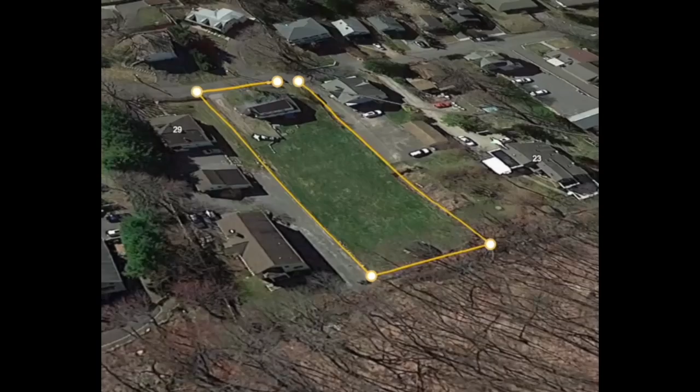Ridgefield Inland Wetlands Board. Public hearing. Application IW24-19. 27 Abbott Avenue. September 26, 2024.

Okay, this is the regularly scheduled meeting of the Town of Ridgefield Inland Wetlands Board for Thursday, September 26, 2024. In attendance, we have Carson Fincham, David Smith, Alan Pilch, Tim Bishop, and Isaac Flatto, and myself, Susan Baker, and staff members Artie Paranjape, Caleb Johnson.

And first on our agenda this evening will be IW 24-19, 27 Abbott Avenue, plenary ruling application for the construction of 10 residential townhouses with associated drainage and landscaping within the upland review area of wetlands and watercourses. Owner Vitan Alimi, applicant Brian Carey. And do we have new documents? I think we have new documents that Caleb will read into the record.

Yes. Okay. We have Land Tech response to Steve Danzer comments dated September 12, 2024. Steve Trinkus, 27 Abbott Avenue review dated September 24, 2024. Intervenor attorney correspondence dated September 24, 2024. DEP listed species to protect. Intervenor reply to applicant introduction of irrelevant materials. 27 Abbott Avenue site plan dated September 25th, 2024. 27 Abbott Avenue drainage report dated September 25th, 2024.

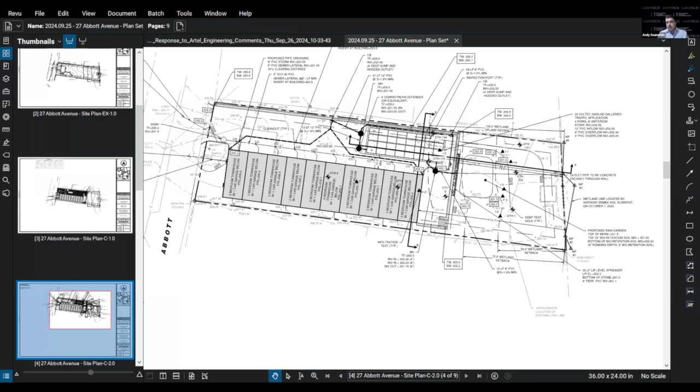In terms of the drainage behind the wall, we removed the drains behind the wall, as recommended by the third-party reviewer. So there's no drains behind that retaining wall. And then the level spreader comment, we've revised this rear backyard now, which was to have soil amended and plantings and the such. We've now introduced a rain garden. So there's a rain garden here now also.

So from a drainage perspective, again, just to recap, roof runoff, all paved surfaces, go through a catch basin, through a hydrodynamic separator, through the infiltration system, into a level spreader. The level spreader now overtops into a rain garden. And then from the rain garden, it would go out towards the wetland.

So the rain garden now, I know LID was a big talk. So this is one of those, I'd like to call them biofiltration type LID that we've added and implemented now through the rear yard. And in a minute, you'll hear from Brian how we've replanted that entire backyard and incorporated plantings within the rain garden.

And by regrading this backyard and amending that soil, it allows that runoff to go directly to the wetlands versus going onto neighboring properties as well. So that one's kind of twofold. It was an Artel comment as well as an SLR comment. So those were really the 3 minor comments that we introduced.

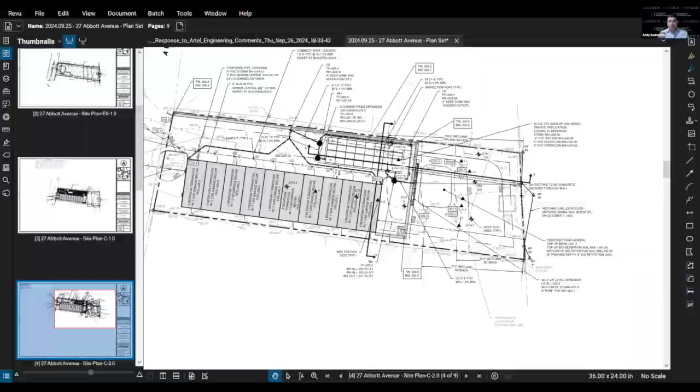The rain garden, just so you know, does about an additional 500 cubic feet of water quality volume. So I think before we had about 1,500 cubic feet of water quality volume. So that significantly added some more water quality measures and LID measures to this plan. I'm more than happy to answer any questions before I kick it over to Brian to go through SLR's comments.

Any members have questions at this point? Hearing none, I'll have Brian go through SLR's comments. Thank you. Thank you, Andy. Again, my name is Brian Carey, Director of Environmental Services for Landtech. I'm also a professional wetland scientist with the Society of Wetland Scientists.

So we did get SLR's comments dated September 11th, right before the previous meeting. And we agree with them, and we basically changed our plans, the submitted updated plans to comply with their recommendations. That being said, the first one, as Andy discussed, was talking about LID. We had a little bit of a discussion about that. We ended up putting in the rain garden, as you see on the planting plan.

We do agree that does provide a tertiary stormwater treatment. It provides a little bit, the water quality coming out of there will absolutely be improved. We think now with the stormwater treatment train, that this is really just a polishing unit, and that it really can't hurt putting that in there, and does provide a little bit of a nice site feature that will have some ecosystem benefits.

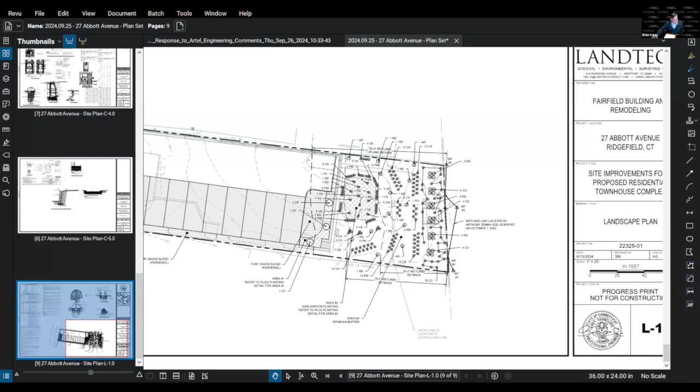I don't know if the commission has been out there recently, but directly off-site and on the border of the property, there is an existing shed. That will be removed. All of the garbage and the foundation that is there will be removed. We will submit photographic evidence to the town to show them that that's all been removed. Obviously, that's something we need to do to install the plantings in the vegetated buffer.

Again, comment 4 was about the hay-scented ferns. I discussed that. We did remove that and revise that. We are in agreement with that. Question 5, they asked for us to provide a soil amendment plan. Not a problem. We did supply that onto the planting plan for the contractor, so it is here.

It will be dictated by taking random soil samples throughout the planting buffer and determining what kind of amendments are necessary. So that will be on the contractor to work with us to basically implement that soil amendment program. We do think that's a good idea based on the amount of plantings that are going into the area.

They asked for a responsible party monitor. That is absolutely something that we expected as part of the, if and when the permit is issued, that would be a specific permit condition that the applicant has no problem following. We supplied what we think is the monitoring details regarding frequency and reporting that we see on other projects. So that is not a problem.

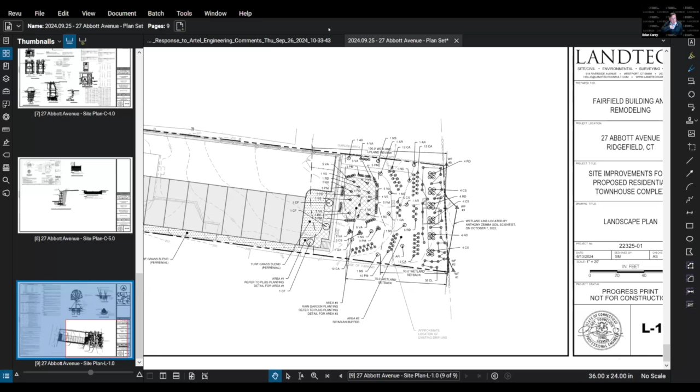As you know, during the last set of questions from SLR, they asked for a long-term habitat management plan for the buffer area, which we supplied. This time they were asking if there's any interest in permanent protection. I did supply into the record, as a response to the comments for SLR and also for the commission, a model conservation easement that we've used in the past. The applicant has no issue putting a model conservation easement on that part of the property.

What I'd submitted would need to be tweaked a little bit to allow for the maintenance of the rain garden. But that document, if needed for the conservation easement, could encumber the long-term habitat management plan, making it one standing document that could be put on the land records. And that way, if the property were to change hands, that would be maintained in perpetuity as a permit condition that would also be filed on the land records. That is something we're willing to do.

If the commission wants that, you could make it a part of any permit condition, part of the approval that would be filed prior to obtaining building permits. It would be done upfront.

Question 7, they wanted to see a comparative analysis based on this plan, the existing 10-unit plan, based on the 2018 approved plan. And we did provide that, showing that this 10-unit plan, which is in front of you now, does increase the buffer. It does treat all stormwater management in accordance with the town of Ridgefield regulations, but also the new state of Connecticut stormwater regulations.

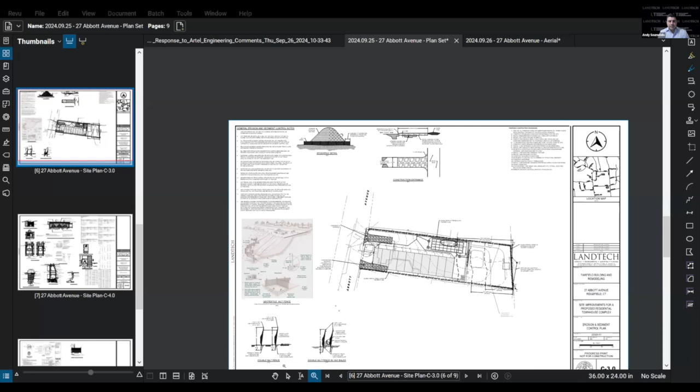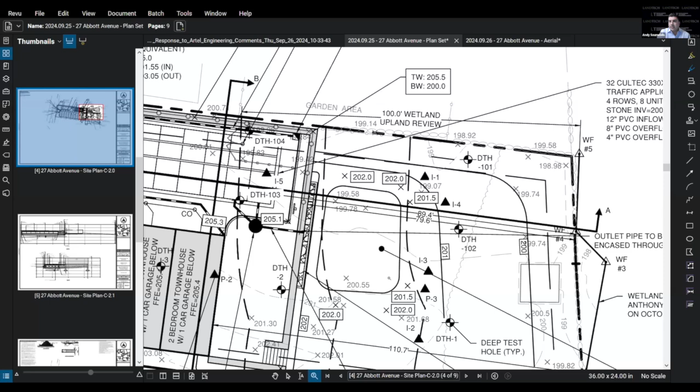I guess I'm a little confused about the bioretention comments and not being designed correctly in terms of taking credit for the first 6 inches. Let me just zoom in on the bioretention. So here's the bioretention system. We have restrictive soils 3.5 feet down. To create that 3-foot separation, we're using that 6 inches below existing grade to put in the bioretention mix. And then we're raising the grade 6 inches to create 6 inches of additional storage.

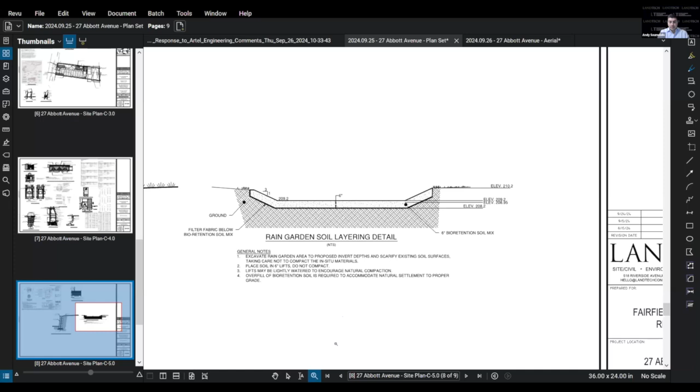So in this cross section, I provided a quick little detail of this bioretention. And that's what you see here. The separating distance from the bottom of this to the restrictive soil is 36 inches. And then we built the grade up slightly, 6 inches, to create this volume here of additional storage. So that's how the bioretention system was designed.

In terms of the stockpile area, we could easily relocate that stockpile area. We could add additional notes that there is no stockpiling on site, that all excavation work is directly hauled off site. That's also fine with us as well, to eliminate the need for stockpiling any soil on site. So we can amend the construction sequence to do that as well. And we can amend the construction sequence to make sure that drainage system is protected during construction.

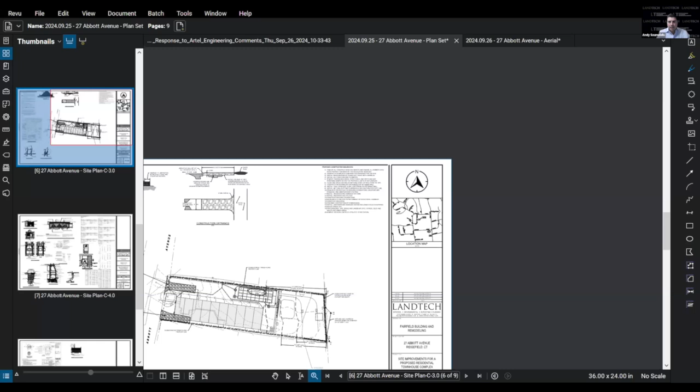Yes, the foundations typically go in first, and we can put construction fencing around that detention system to protect it. I'm not sure why we're shaking our head no, but we certainly can. There's means and methods to do anything. Not ideal, right? It's going to take longer construction, but if that's what the commission wants, we could certainly do that. It's not like the drainage system is underneath the building. The drainage system is more than 10 feet away. So there's plenty of room to install footings and do what we have to do to construct the building.

Typically on a site like this, we'd work our way out. Ideally, we'd probably even do the plantings and this work first, and then work our way out by building the wall and then the building. And then putting in the drainage systems near the end along with the utilities. So we don't see an issue with that.

In terms of the snow removal, we did locate it back to the front. As you recall, originally it was here, and there were huge concerns about snow removal. So we put the snow removal to the front of the property.

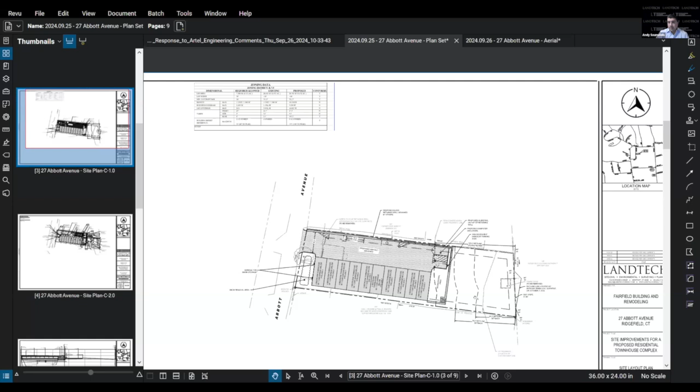The tree, I'm not sure if that tree is going to end up surviving construction in its location, but it's way outside the regulated area, and shouldn't be a concern there. Considering the amount of replanting we're doing on this site, I don't think losing that one tree up front is that detrimental to this piece of property. The resources again are near the rear of the property, which we are heavily implementing a new vegetation plan.

But yeah, we did relocate the snow removal to the front. That tree is also a Norway maple, which is a state listed invasive species. Just to add that in there. And yeah, we weren't stockpiling the snow in the front and planning to treat that snow and then discharge it off our site. So that wasn't the goal of where we're stockpiling. The goal was to relocate it further away from the 100-foot upland review area. So we located it to the front of the property.

Jay Klein, for the record, attorney for the applicant. Seeing that Mr. Verbickus is here too, I think it's important to get his take on that feedback from Mr. Pilch. And also, if Mr. Verbickus could, if you don't mind, kind of reiterate something that I heard earlier, but I want to be clear just because there is an intervener involved in this application. Of course, the question is whether this proposal that Andy and Brian have walked through tonight will likely have the effect of unreasonably polluting, impairing, or destroying the public trust in the offsite wetland.

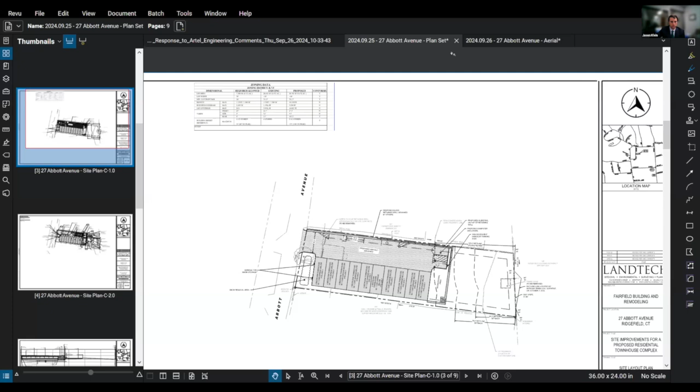I guess that's me, right? Dinus, feel free to respond. Sure. Oops.

With respect to first, construction sequencing and so on, it's not going to be an easy one. With this site, perhaps working from the back and working out to the front might be the way to do it. But again, I'm not sure. With respect to the stormwater management area and compaction due to equipment and so on, as the soils here are, I believe, fill soils, not native to the site in the upper strata, I suspect that if there is any kind of compaction, those soils could be removed and replaced. Just trying to think how I would do it if I had to. But again, the best practices would be to try and avoid compaction. But I think there's ways to make it happen.

With respect to potential impacts to the wetlands, I don't really see it. Again, I think there's a pretty substantial underground stormwater management system, and then flowing into a rain garden type of planted area, and then overland flow for another 50 or more feet. And then the water has to go through the rock wall, and although I have not visited the site to examine it, generally rock walls tend, over time, to either sink into the soil somewhat, or

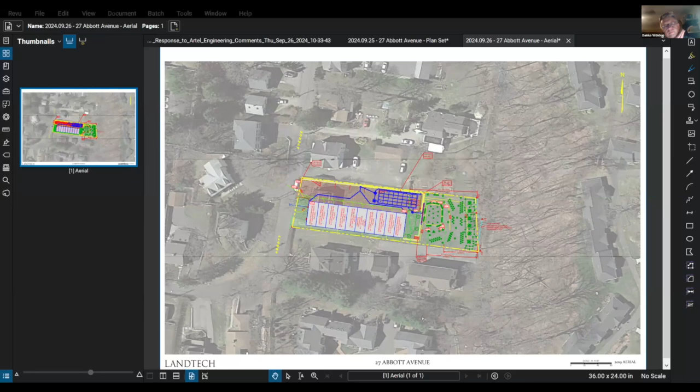Ellen, do you feel like your question was responded to adequately? Do I have to pass judgment on that? Do you have any further questions? I have no further comment. Okay, thank you. Carson? Thanks, Susan.

I have a question. It could be for you, Alan, or it could be for anybody. With respect to the potential compaction issue, particularly because this is, as admittedly laid out, a difficult site to build what they're proposing to build. Not impossible, but difficult.

Is it typical, or would it be possible to inspect the infiltration both in the rain garden and for the Cultecs after they're installed, to ensure that compaction hasn't occurred and that they're functioning properly? Would that be a normal course of thing, or would that be a possible thing, or something that you would suggest?

Would that be for me or to Alan? I'm sorry. If you're asking me, I suppose you could do that. Usually you put some type of standpipe or other measure in there where you can observe it and see how long it takes for it to empty out. It'll give you an idea as to whether or not compaction of the soil has had a deleterious effect on the infiltrative ability of the stormwater management practice.

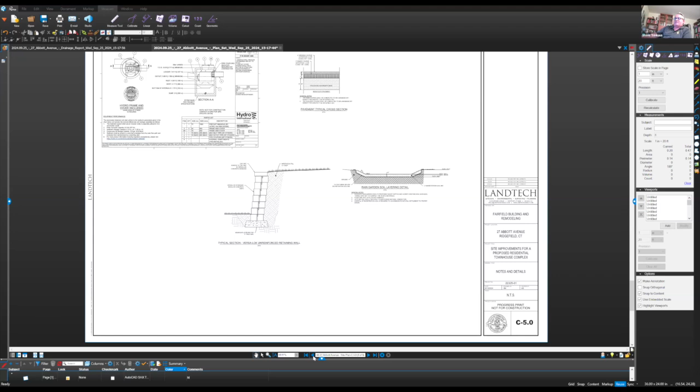Adding the rain garden is not going to get you over the top, but I'll get into that in a second. Alan brings up a very valid point about compaction, as does Carson. I just want to get back up to the cross section here. There's a lot of fill going in here for the building. You can see that, and you can see this area, between the Cultec and the building.

Putting test pipes in isn't going to be able to prove the infiltration rate is good, bad, or ugly, quite honestly. The only thing you can do is do infiltration tests of the native soil before you put in the Cultec system to make sure that it has the same infiltration rate as the native soils in that area. And then you build the system, and quite honestly, probably cross your fingers it'll work.

I definitely agree with Alan that these practices are way better under undisturbed, unpaved surfaces in a native environment, because you generally are just trenching for the Cultecs, putting them in native soil, putting the gravel in and backfilling them. So there's no risk of compaction because all the work is done from outside the excavation. But this is part of the reason why DEP requires you only use 50% of your slowest observed infiltration rate, to account for construction issues.

But, as other people have pointed out, these are not fully native soils. There's really a hodgepodge of material out here. How well this works is quite honestly anybody's guess. I don't have a lot of confidence in it. But the reason I want to share the screen, and this goes to a point I raised last meeting, this is the longitudinal section going from the west to the east of the Cultec system.

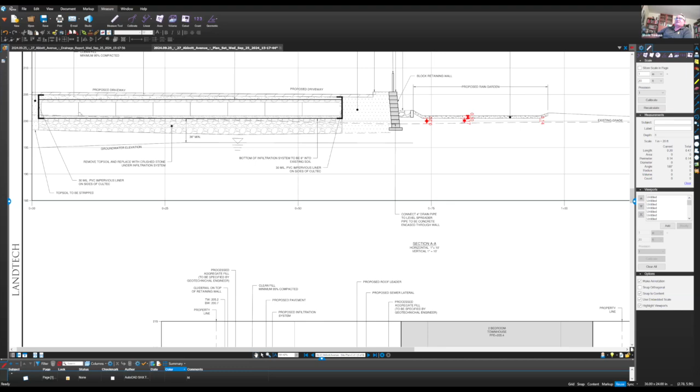Now they're showing a 36-inch separation to groundwater from the bottom of the Cultec, but the stone is an integral part of the system. The 36-inch separation per the DEP manuals is from the bottom of the permeable system. That's the gravel layer, not the Cultec, because water coming into the Cultec is going to saturate the gravel layer first, long before it ever fills up the Cultec. So this does not conform to the DEP manual providing the vertical separation.

Now on the rain garden, and you can just ignore the little dimensions here, the rain garden itself is the hatched area. The dashed line is the native soil. So this is being installed above the native soil, anywhere between 8.5 inches on the western end to about 16 inches on the uphill end. There's no specifications for what kind of material is going to be placed between the bioretention media and the native soil. There's no call for scarification of the native soil. So basically, this is not going to infiltrate. You have a very dense grass mat here, and that's obvious in the field.

Additionally, the infiltration tests that were done by LandTech to the east of the rain garden, I think infiltration 1, 2, and 3, were done at various depths between 20 and 27 inches. So that's down in here. No infiltration tests were done on that existing ground surface, and that's your infiltrative surface today, not 27 or 20 inches below grade.

The rain garden on the plan is called out at elevations around, I think, 201 to 201.5. And yet if you go back to the detail, which I think is sheet 8, you'll notice that it says 209.2 to 210.2. So that's clearly kind of a cut and paste of something else.

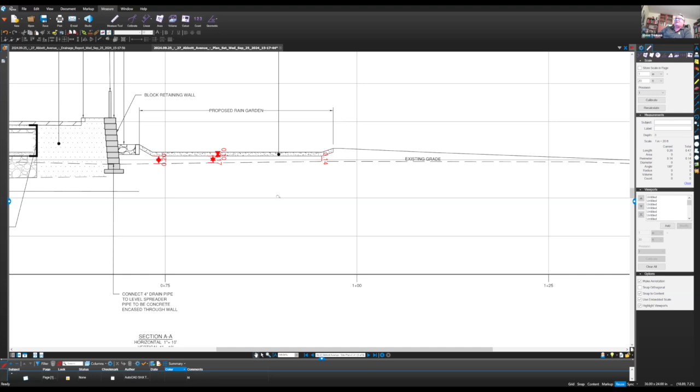So, the bottom line is there's still going to be water quality impacts to the downgradient wetlands because of inadequate treatment of the runoff. That has not changed from the first application to this one. This application is really a conventional plan. This is not an LID plan. Just because you put a rain garden here or bioretention, the two terms, in my professional opinion, are interchangeable. The design is the same. I know, as an example, New York State has two different specifications, but at the end of the day, in the LID world, a rain garden and a bioretention system are the same creature.

But when you look at this site, you've got the row of buildings, all impervious. You have the driveway and all the parking, all impervious. It's all directly connected via catch basins to structural drainage systems. This is conventional stormwater management. It's not anywhere close to an LID design. And simply throwing a shallow rain garden on here is what we term greenwashing. It makes it look green, but it doesn't change the fact that it doesn't work in the first place.

The bottom line is there will be water quality impacts to the offsite wetlands, and that's going to cause changes to the water chemistry over time. These impacts, as I've stated previously, do not occur on day one, but day 100 you will see it. So it doesn't work. That's the short answer here.

As for the snow storage, putting it out front, you can't really put it around that tree. I don't think your plow guy or anybody can get in there to dump it without damaging the tree. If the crown of the tree is outside the limit of construction, then the tree will likely survive. But if the crown extends into the westernmost unit, the roots also mirror the crown of the tree. And I say this having a Bachelor of Science in Forestry, that, depending on how much of the roots are damaged, the tree will get impacted. It may not die today, but one day you're going to wake up and find the maple tree is pretty much on its last legs.

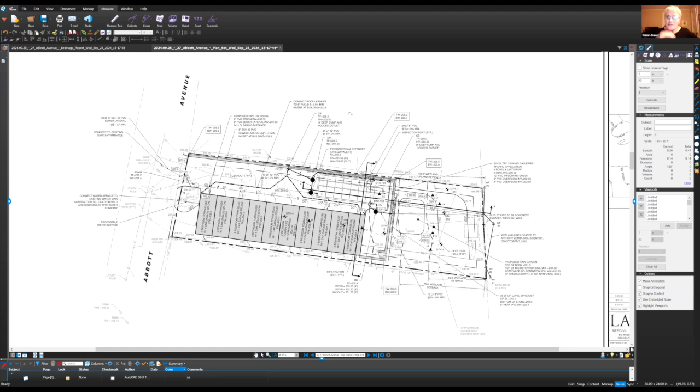Okay, thank you. Dinas, do you have a response? Yes, just a couple of things with respect to the new manual that we're looking at. From what I've read, it states when you have a subsurface infiltration system that, in this case, has enough capacity for the water quality volume, you're about 90% removal of total suspended solids, as well as nitrogen and phosphorus. It also states that you could assume your floatable debris would also be removed to that degree.

With respect to placement of the systems under pavement, it's done frequently. At the Shops at Marcus Dairy, we've got probably a mile of these Cultec type units under the pavement. It's been okay at Danbury Hospital, in the medical arts facility there. We had also a sizable amount of under-asphalt stormwater management, although that scenario is a little bit different in that the soils were really sandy.

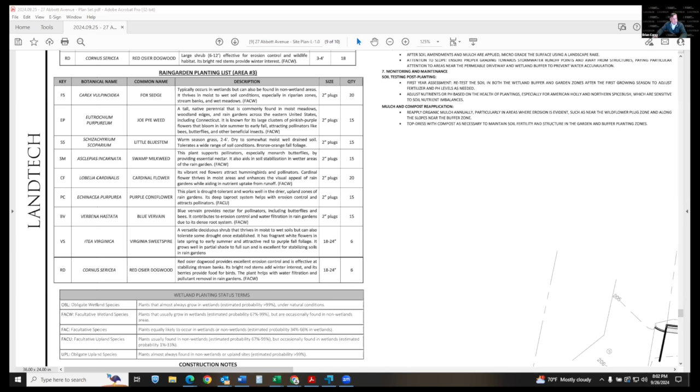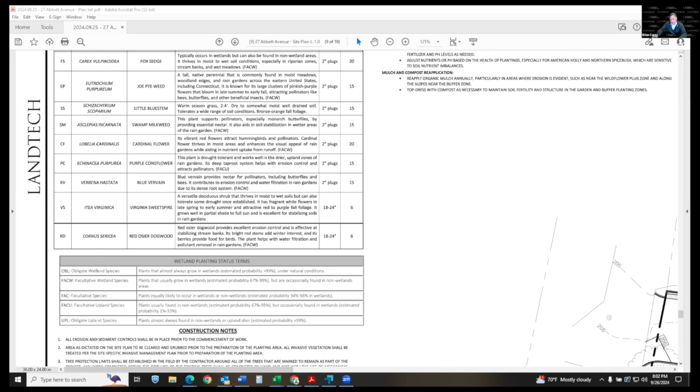If I could just share my screen right now, he's talking about whether it's going to be wet or dry. All the plants that have been specified for the rain garden are either facultative wet or facultative upland, and you can even see it in the wetland planting terms, what those terms mean. So it's not that we're specifying obligate species or truly upland species. These are species of plants that can tolerate wet conditions, and in some conditions can also tolerate drier conditions.

So to say that this is going to function exactly one way or the other, that's just not how nature works. Sometimes it's going to be wet, sometimes it's going to be dry. Those are the considerations we take into account when we do these designs. And I'm sure Mr. Trinkaus, as a professional who does similar design drawings, uses similar methodologies that he is disregarding right now when he does his own projects.

I'm sure he has relationships with Ernst Seeds. I'm sure he has relationships with New England Wetland Plants. I'm sure he consults with them, as do all of the consultants in the state of Connecticut who are doing similar projects. So I do take exception to that. And I know Andy is probably going to have some more responses, but it's just not factual to say that these plants are not going to work in there.

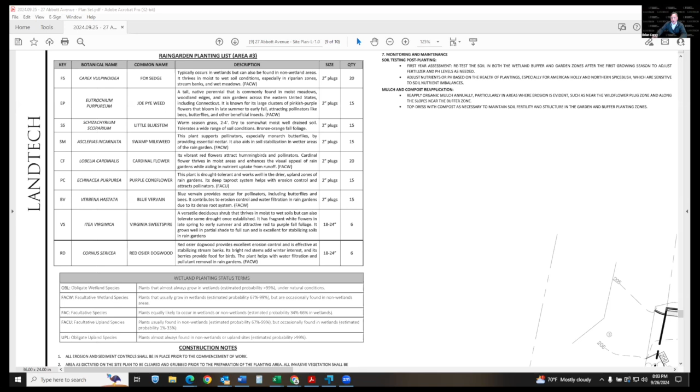Building a rain garden is pretty typical. If you go to the town of Greenwich, which has a very specific rain garden situation, these are the plants that they require. Connecticut NEMO.

Okay, we really are trying to wrap things up, thank you, because we have another hearing coming up, so quick responses would be welcome. Sure. I just got two quick ones.

One is Mr. Trinkaus brings up a good point about our bioretention mix, and we have a void between that and the existing elevation of the ground there. So we're more than happy to extend that biomix to be within the first 6 inches of the grade there. So we're fine with extending that biomix further down. And I think we're beating a dead horse a little bit here, but I just want to share the Cultec website really quick.

It is a standard practice for these to be under parking lots. You go on their website right here on the homepage. You see them here in a big shopping center parking lot, and again here on a single family, right underneath the driveway. It is very standard practice for these systems. This is right from the manufacturer, to be under paved surfaces. It's very common practice to have those there. And I think that's it.

In terms of the TSS removal, I think we agree to disagree on what each system removes along the treatment train. And I think we point to the manual, and that's how our design is done. And those are the figures we use in terms of TSS removal in our treatment train. Thank you.